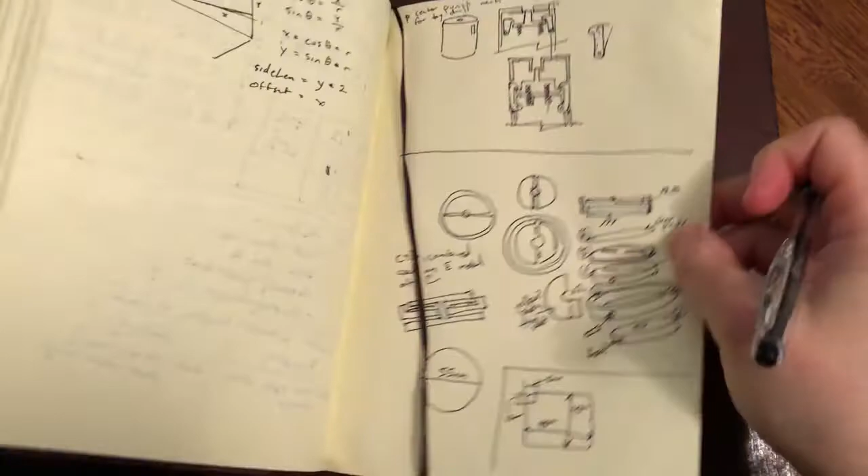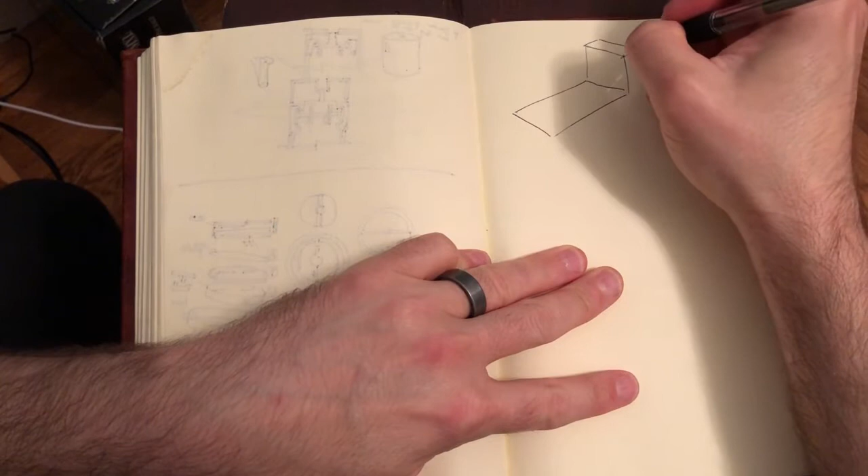Okay, so let's start planning. Just sketch out the general shape of a pinball table. We've got sort of two boxes essentially - a box in the back, and the main gameplay area. There's a couple other things of course, we need some legs for it to stand up on, but that'll come later.

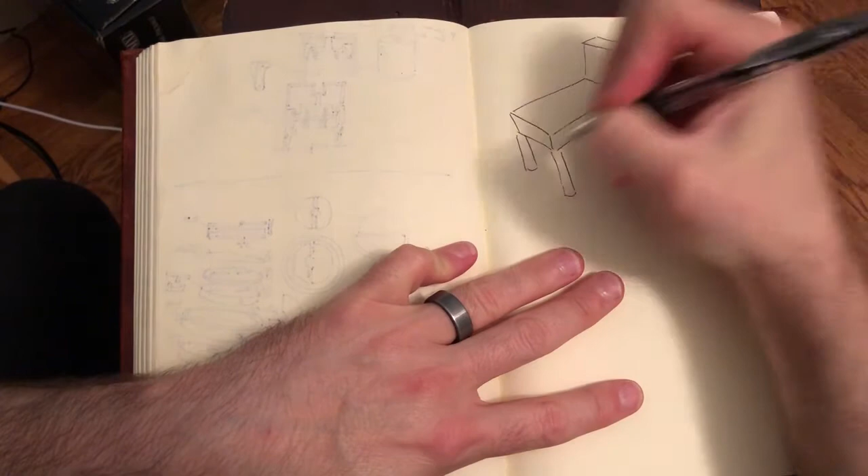What I want to do right now is figure out the main play features of this. Obviously this is going to be really small, so it's not going to be a fully functioning pinball table. So there's a question of what do I want to include and what do I want to exclude.

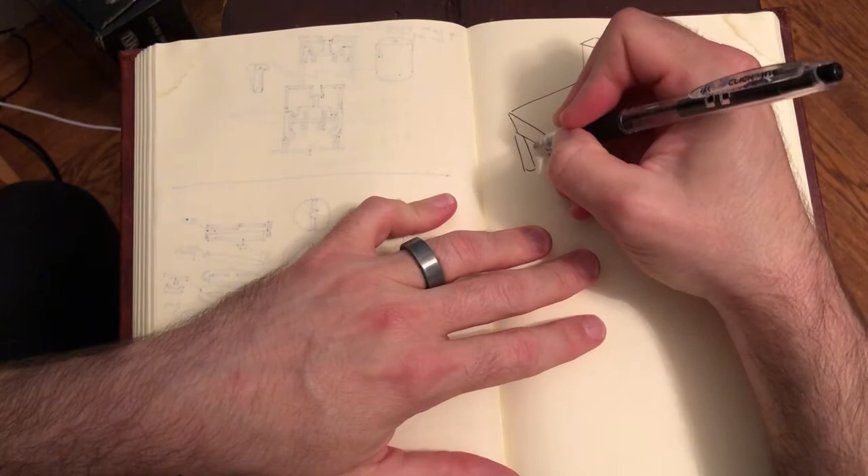There's at least a couple of things. On a real pinball table, there's what makes it fun, right? What do you do with a pinball table? Well there's a couple things, right - there's the plunger.

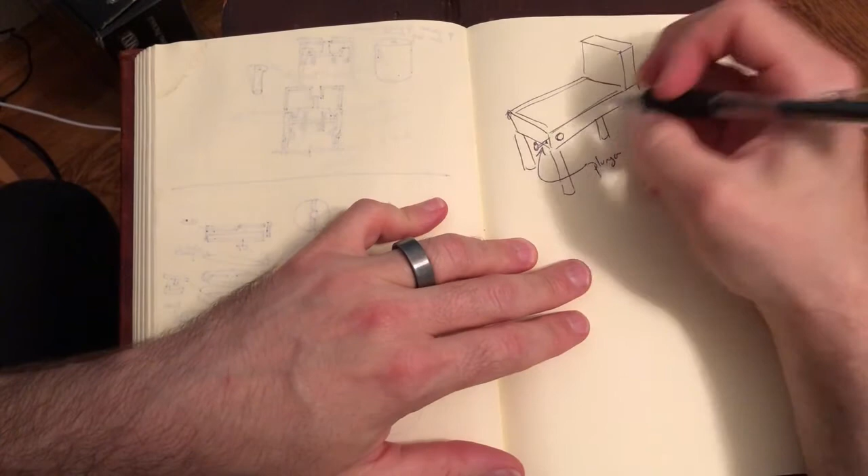We've got a plunger that you use to shoot the ball up this way, right? We've got, of course, the paddles, flippers. Sorry, apologies in advance for anybody that's a pinball aficionado, I'm probably going to get all the terminology wrong.

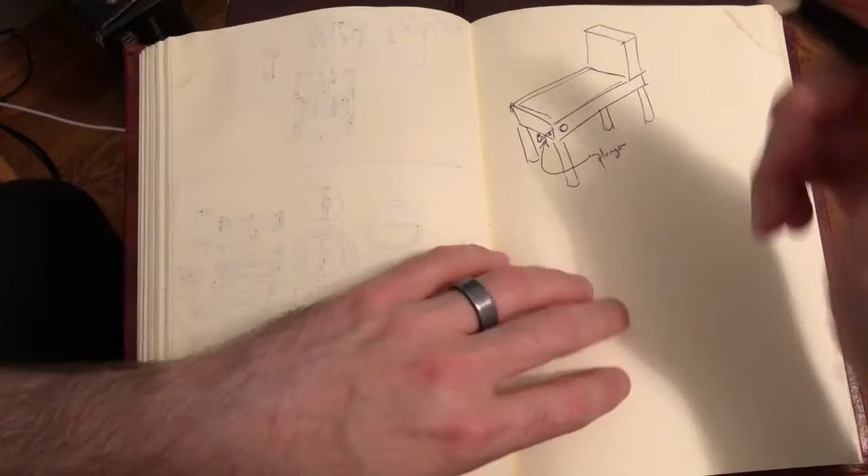Just bear with me. So we've got flippers that control, that you use to control where the ball goes. Well, as best you can, right? So we've got two of those.

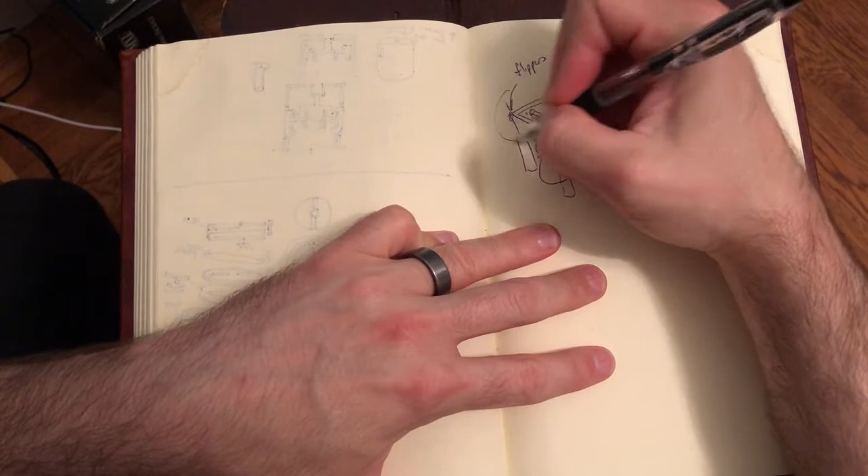We've got a whole bunch of stuff that goes on, fun stuff to hit, and in a modern pinball machine this gets really complicated, it's almost like robotics going on up here, right? And we've got some sort of display here that shows your score. So I'm not going to be able to do all of that, right?

There's no way we're going to take a fully functioning pinball table and shrink it down to 1/18 scale without giving some stuff up. So I'm going to do some compromises here.

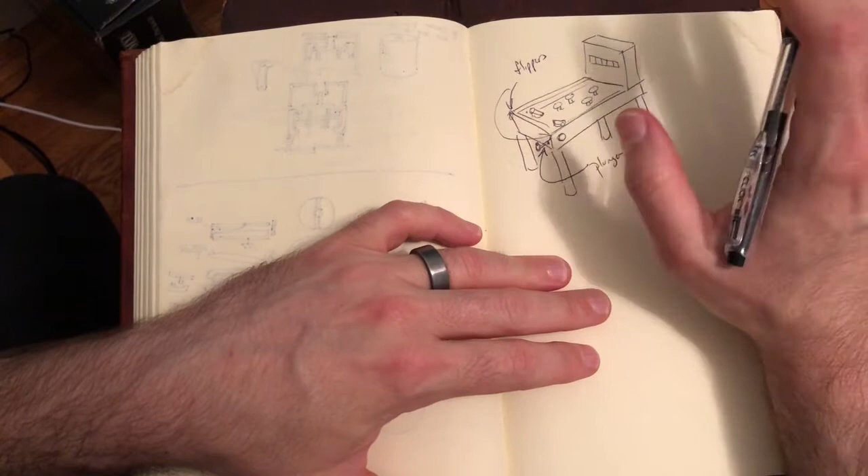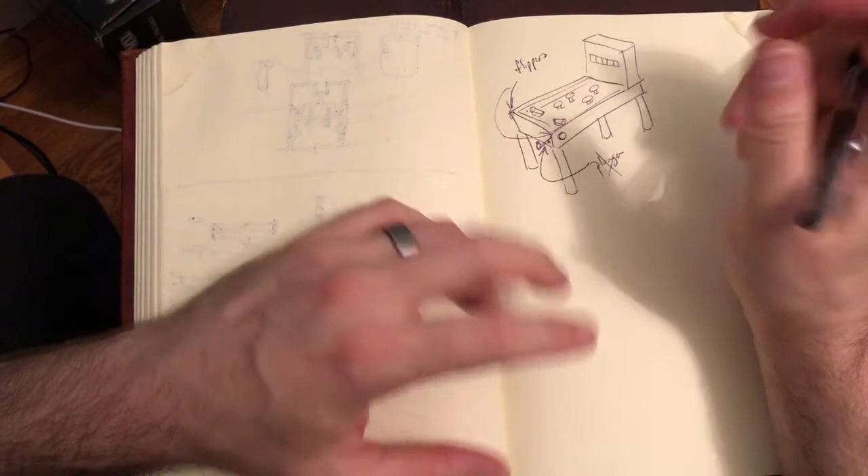What I'm thinking is I'm going to just ignore the plunger altogether, I'll come back to that in a second. I think the really key thing to make this feel like a quote-unquote working pinball table is the flippers. So I really want flippers to do something - I want to be able to push a button here, have these move, and in some way interact with the ball, right? So if I'm getting rid of the plunger, how does the ball get dropped?

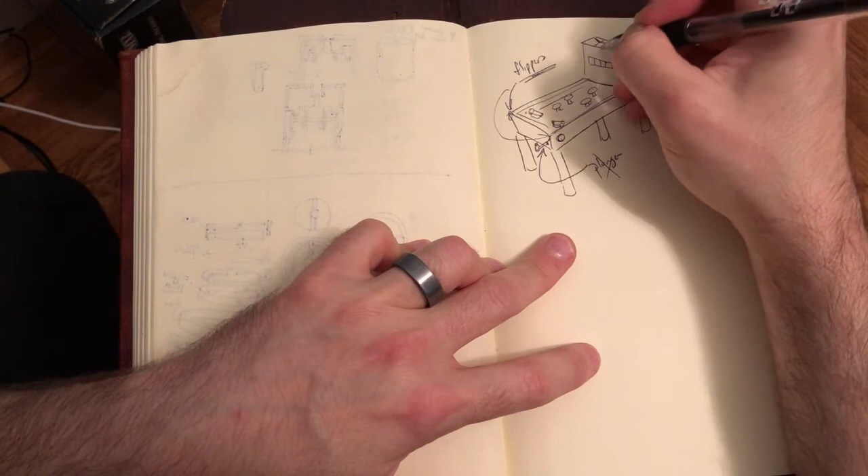Well, that's where I think a limitation kind of becomes an opportunity. So what I think I'm going to do is use this back box and have a hole here that goes down just a little bit. You'll notice I'm drawing this offset here, more on that in a second. Basically, you drop a small ball bearing in a hole here, and then have that come out here.

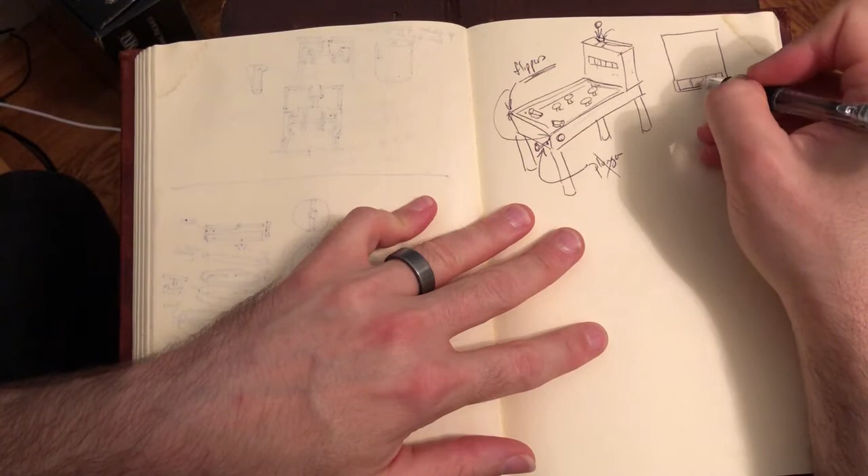So what this back piece is going to be is sort of like this - it's going to have a couple of exit spots for the ball bearing at the bottom. So this is open here, and this whole thing fits right there.

So, cross-section wise, I want this to be a little bit offset. So what I'm doing here is I think I'm going to make this like a little mini pachinko machine inside it. So you drop a ball bearing, right, and then we'll have some stuff for the ball bearing to bounce off of.

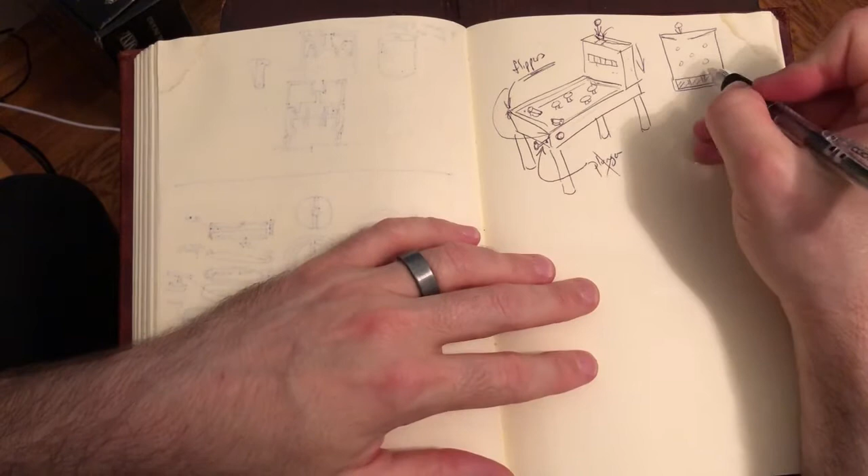Now, I know this is going to be very small. We're talking about, this isn't too much - this is almost full size, right? Probably we want it to be about, let's see, probably something like this is about the actual size it'll be for real.

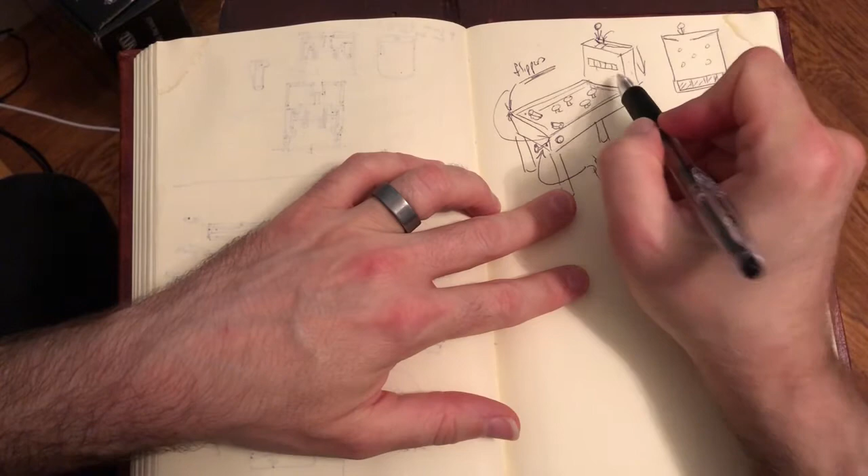But I think we can still get away with that. And what I think we kind of get, well, not for free exactly, but that got me thinking about the number displays you get on the backglass of a pinball table.

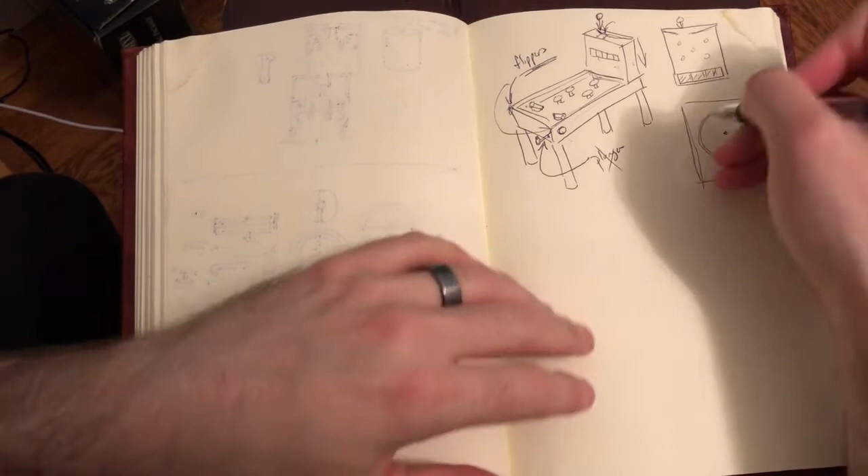I think what we can do that'll be fun is if we have a circle here with a pivot there. We can have a little cutaway right about here, and I can design a sticker to go on this circle with numbers on it. Then the fun bit is if we flip this circle on its side, we'll have a nice thin circle, maybe about 1 millimeter or so.

We'll have a bit of a spacer there. I'll probably just use like an actual piece of filament, so we'll have about a 2 millimeter hole there. But what we can do is we can put some fins here.

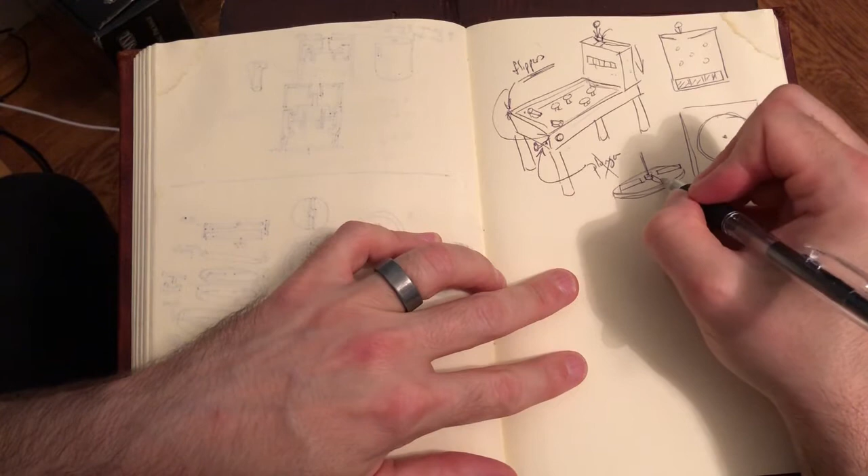And probably you can see where this is going, right? So if we have the back of this with fins here, when the ball gets dropped from a little bit offset, what's going to happen? It's going to hit these fins, make this spin, and that'll hopefully randomize the position a little bit, and then it'll drop out down here.

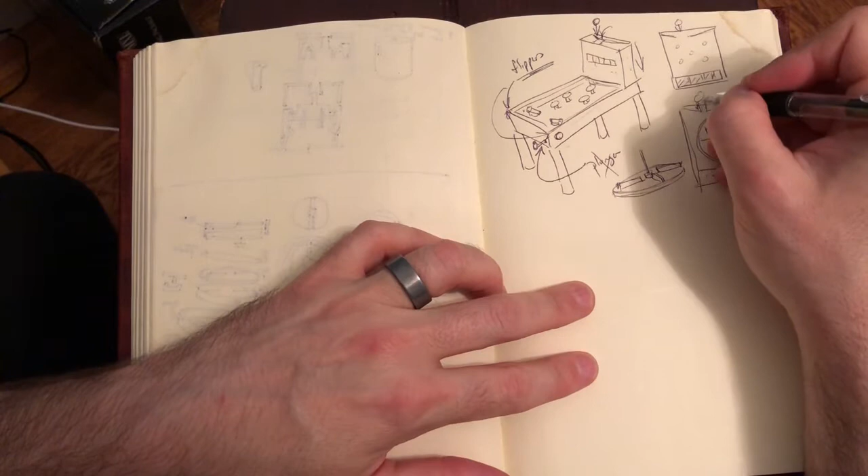This is why you want to draw stuff, because I just realized that if I drop the ball on the left here, what direction is this going to go? It's going to go this way, right? And it seems like it might be more appropriate for these numbers to move clockwise. So probably what we want is this to not be there, but we want this over here instead.

I think that's the plan, at least for this backsplash. The really important thing it's doing is it's allowing us to drop a ball bearing in and sort of letting us do without this plunger.

Again, problems are often kind of opportunities, right? As I was thinking through how that would work and thinking that I wanted something to randomize the motion a little bit, that kind of suggested this. So we'll see how that works out in practice, but I think we can make it happen, and I think that'll be really fun.

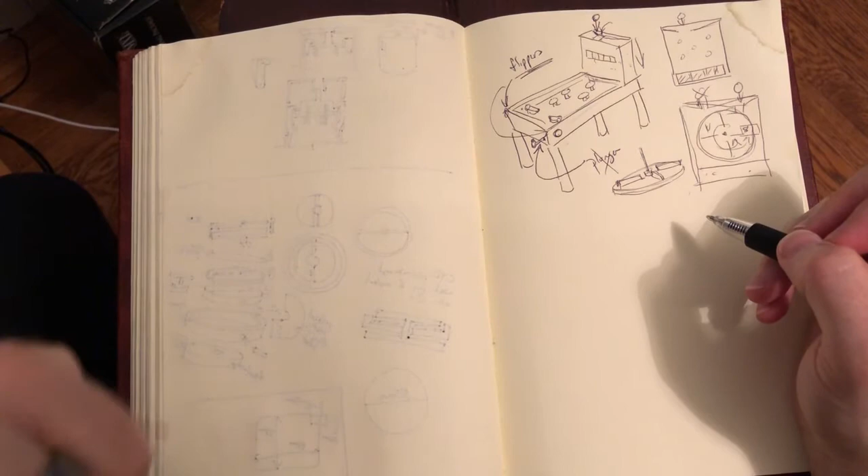Okay, so now on to the real meat of this, which is the flippers, right? So what I want is I want to be able to... there's something we have to have, something that we push in, because pulling would be weird, right? So it's got to be something you push.

When you push it, we need that to result in these flipping up, right? So that's sort of the invariant, we need to be able to do that. Oh, and another thing that we need is we need these to come back in, so there needs to be some sort of return mechanism that pushes the buttons back out.

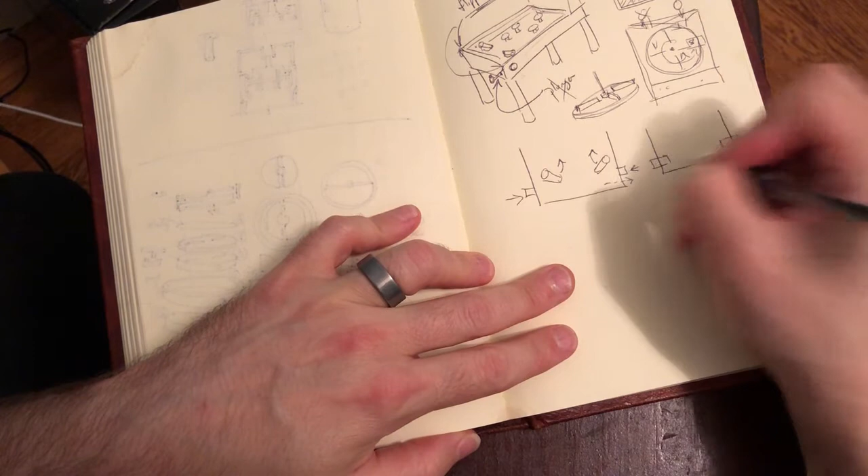So what I've come up with that I think is going to work is if we take a rubber band. Let's imagine we've got our two buttons, right? It's always good to start with the simplest possible thing. So what's a good source of force? Well, a little rubber band has worked pretty well for me in the past. If you haven't seen my oscilloscope video, I'll link that and you can see how that worked out pretty well.

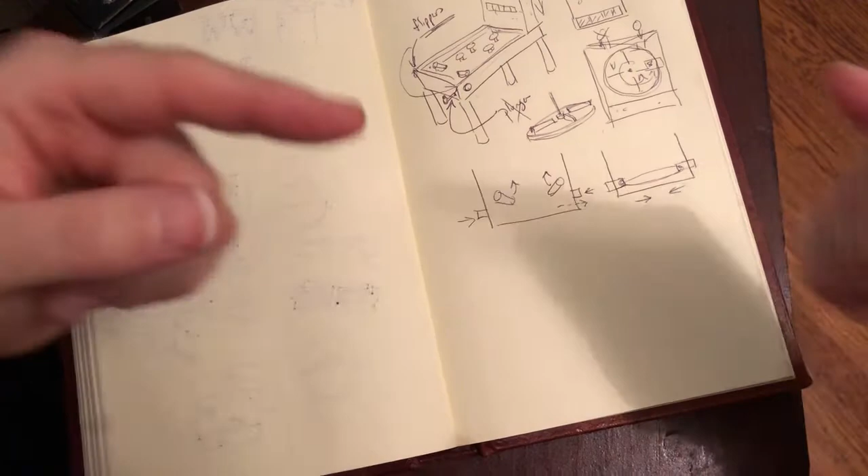So I think that's what I want to use, but what happens if we put some pegs here and loop a rubber band around them? Well, that's great, but that force is going to act like this, so it's going to keep the plungers — I apologize for getting the terminology wrong, which I'm sure I'm doing — it's going to keep this pulled in. What I actually want is the rubber band to provide some return force.

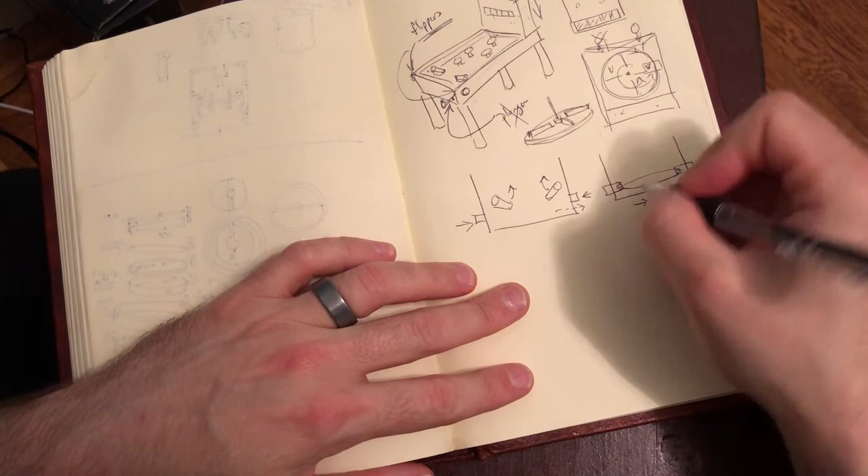So what we can do instead is, instead of connecting these directly, we can have an integrated part here that basically goes around like this. So that's a little hard to see, but it's basically like, so we have a rubber band that goes like that — it connects to one plunger and does the same thing.

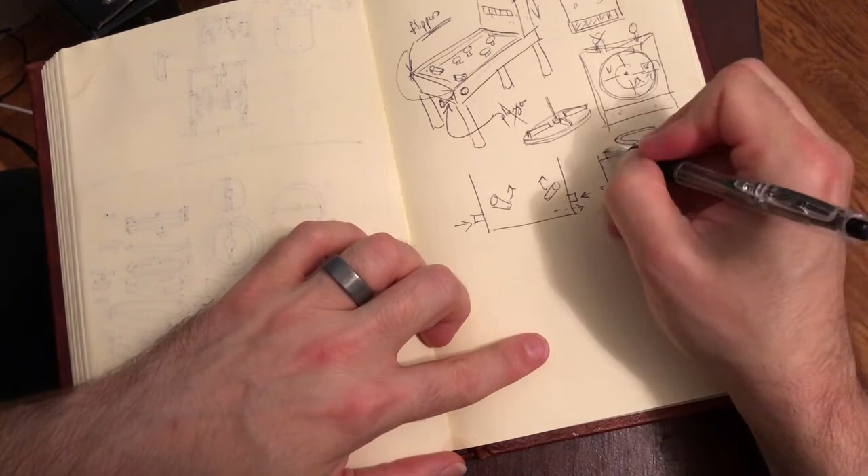Right. So this is why you draw things out. I do think this is going to work, but I have this slightly wrong. It's drawn like this, it's still pulling in, right? So what we actually need is something like this.

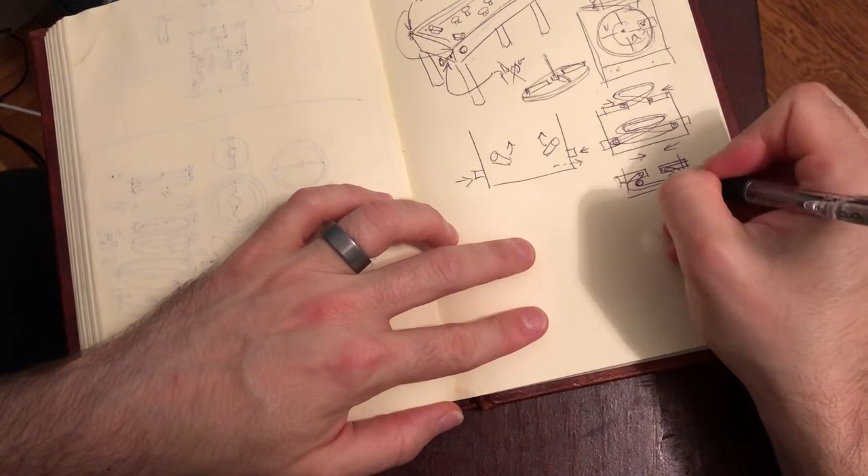So we'll have some posts here. These two posts are going to be fixed to the bottom. And the rubber band will wrap around those and pull these back out. Hopefully, that's the plan, at least.

So that gets the return action, right? I think that's getting us close. But the other thing we need to make sure is that we actually actuate the flippers. So I think the way that's going to work is we'll draw kind of big, so we have a flipper

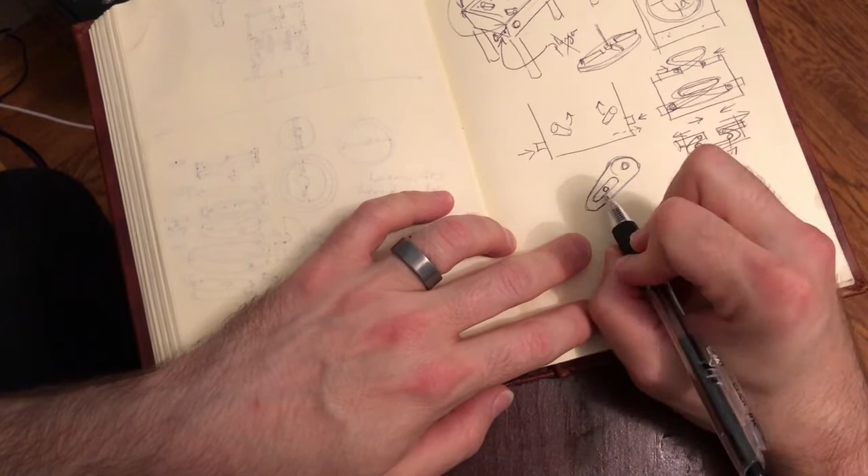like this, right? And what we'll do is we'll have on the underside of the flipper a slot. And then, of course, the flipper will have an axle there. So what we'll do is the plunger will have a little bit that sticks up and rides in that slot. So when this pushes in, it forces this in the direction we want.

Again, this is why you draw. So this would, the way it's drawn right now, if this goes that way, this is actually going to go down, right?

So what we want instead is, let's just think about what this motion looks like. So we've got, that's sort of position A, right? And then we want something that's like there. Position B, right? And now we want to look at, if we compare position A to position B here,

what points, if any, on this shape move in this direction, more or less, right? So what we've got is, it looks like if we look at where this point is, on A, compared to the center point on A, we've got that. So on B, that would be about there.

So it looks like we can do something with that. If we draw that, we've got something that might work. And I think actually what we need to do is flip this relationship around. So when I first drew this incorrectly, in a way that's not going to work, as we found out, as we kind of thought through it a little bit, right?

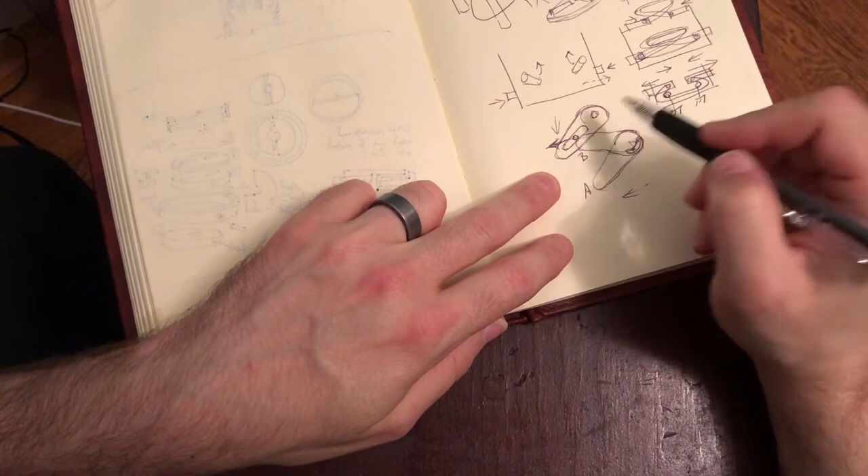I had this peg being a part of this plunger, and the slot belonging to the flipper. But I think what we want to do is we want to flip that around. So the flipper will have a peg, and that'll fit into the plunger.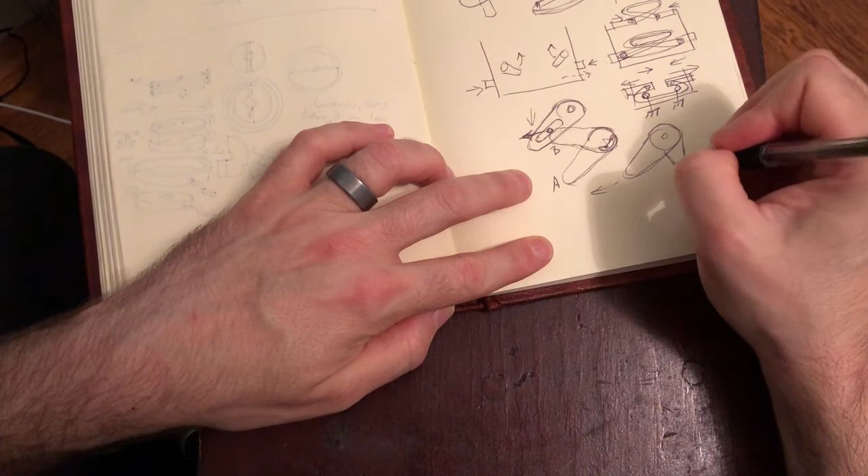And I think we might end up needing the flipper to have something kind of like coming down, right? Yeah, I think this is what we want. This is what we want.

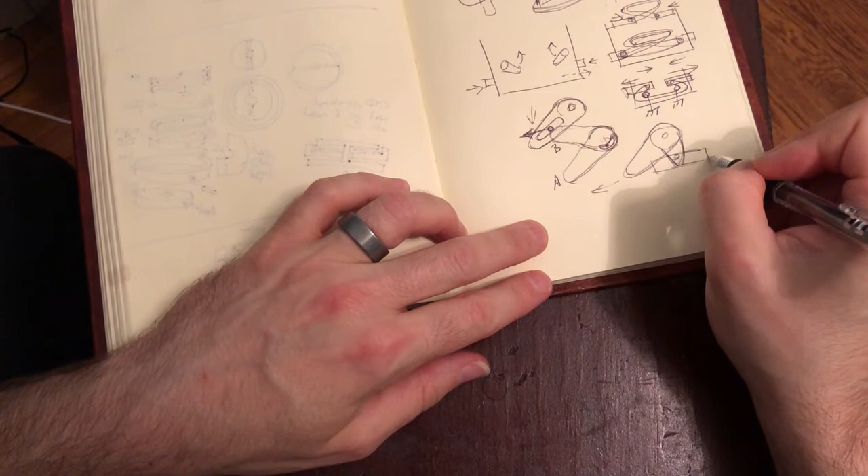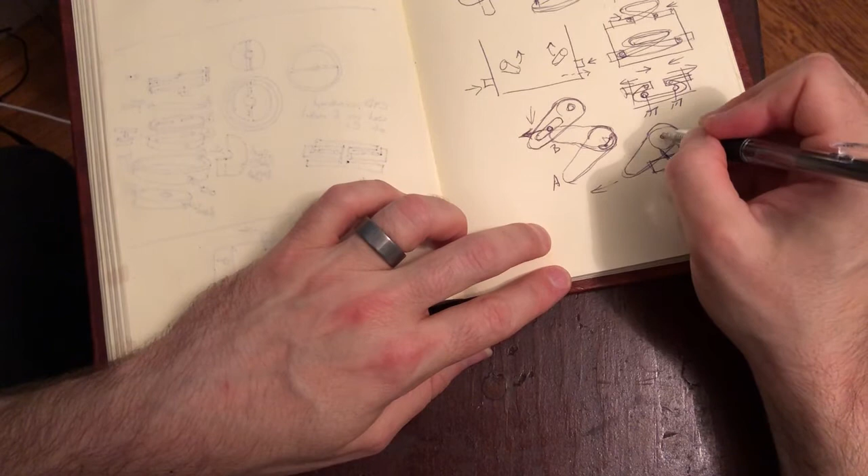So we'll have the flipper here, right? And then we'll have sort of a flat that comes down with a peg, and that'll ride in our plunger. So this goes that way, which will make this part also go that way, but offset from this rotational pivot, which will make our flipper go up.

So that's the general idea. This is kind of like the first phase, right? When I'm designing something like this, I want to just kind of think through the general idea. I thought of most of this earlier today when I was walking my dog.

Obviously, you can see as I went through it, some things were wrong, right? My idea in my head was a little bit different than reality, as it is for so much of life. But luckily, with this kind of thing, all you need to do to correct that is just take a pen and some paper and figure it out. So I think this is all fairly good, but now I've got a general idea.

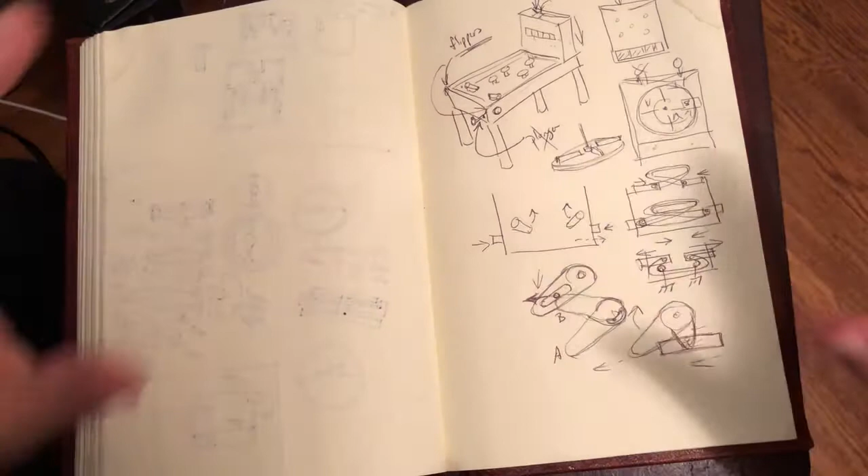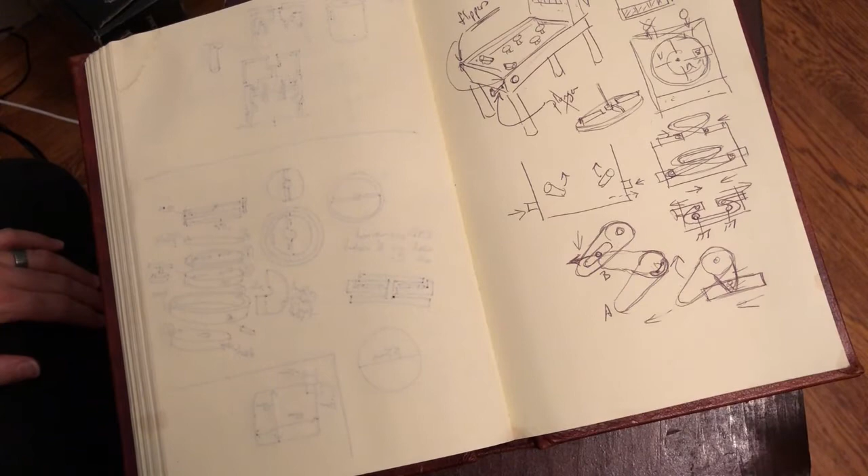I want to at least attempt to do basically some on-paper CAD design. So what I mean by that is I like to just kind of try to draw out what some of these parts actually are going to look like. So the way I like to do that, and I'm going to not use A and B because I already have that here,

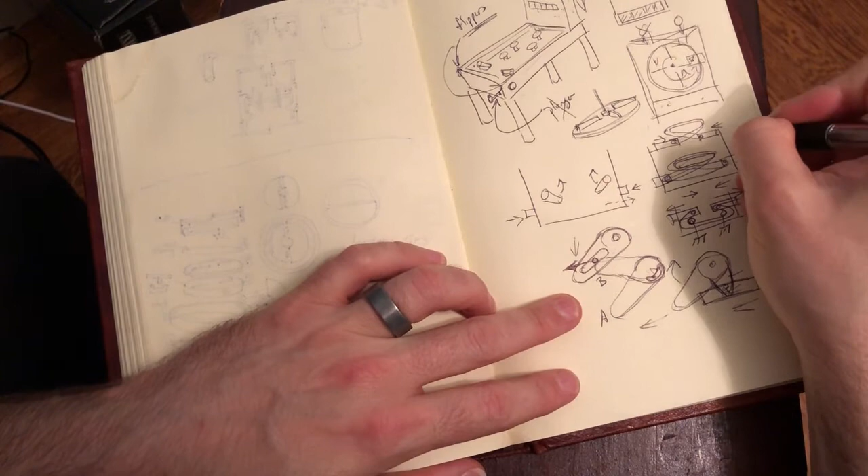but let's start naming some of these parts. And since naming can be a huge hassle, I just tend to give them letters. So I'm going to call this C, right? So this thing that exists to be a button, a tiny button on the side of the overall assembly that a user or player can push. And I'm going to call this flipper assembly D, right?

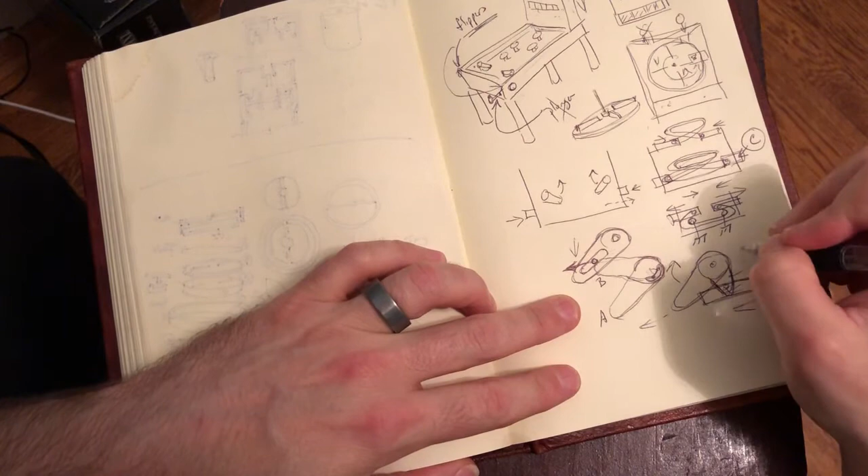And there's going to be a couple of parts to this main thing. So I feel like I've got enough of a handle on the back part.

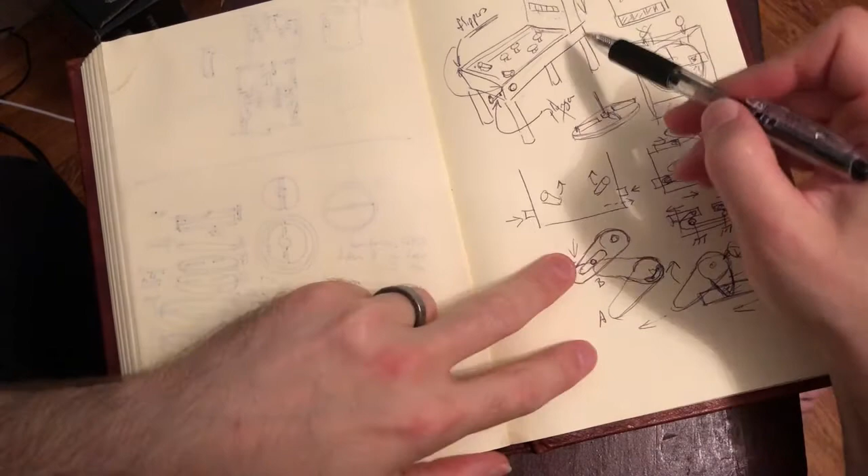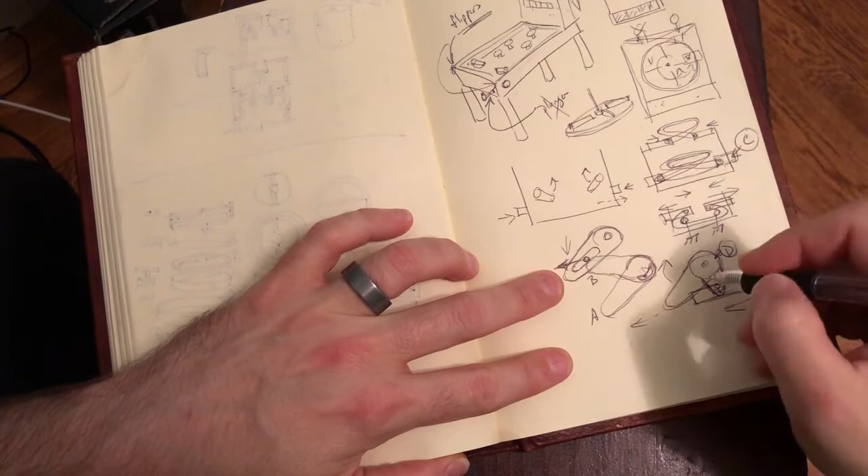Got enough of a handle on this to head to FreeCAD and start making it. But I think I need a little more clarity around the way the flipper mechanism works. So I'm going to give these some names and try to draw exactly what those shapes are going to look like. I need a little more paper.

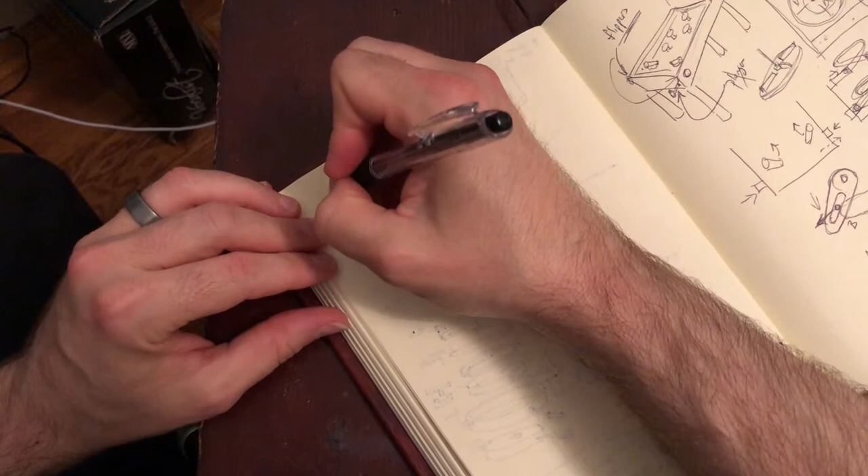So let's tackle C. This is one system, but we're gonna tackle C first. We know one end of it. Let's do top down, right? It's gonna be some sort of cylindrical bit. And on the very end...

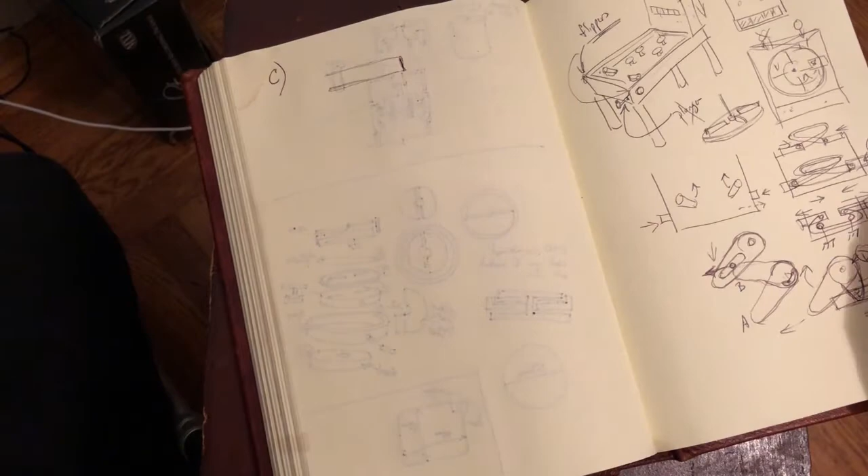Over here it needs to have something that a rubber band can grip and kind of pull. I think the rubber band actually needs to be internal. So we want something like this that goes around. There'll be some peg, fixed, and we want that internal. And then it needs some sort of slot. Okay, so I think what we want is something kind of like this.

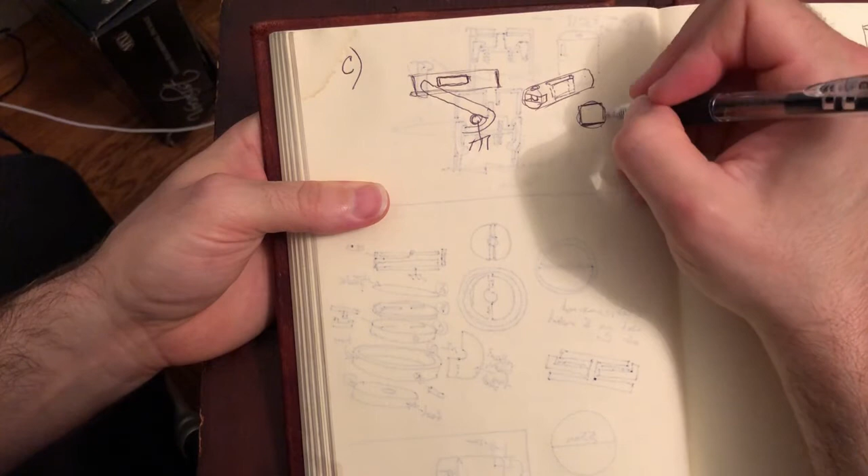So what we've got here is basically a cylinder, although for 3D printing we'll probably want to make this... since this is going to slide back and forth a lot, it probably makes sense to accentuate that. Well, not accentuate, but I'll get smoother motion if both the top and the bottom are flat. So probably make this actually just a square cross section. Let's do that - a square cross section. Maybe we'll still have some roundedness here.

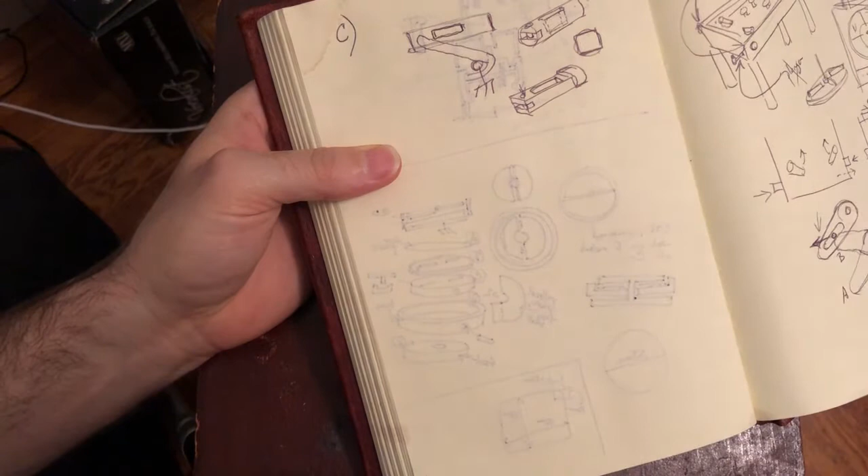We'll see about that. But then we're going to have a little cutout here, with the idea being that we fit the rubber band through here and put a little piece of filament. So this will basically be a peg for the rubber band to fit through. And then here we have a slot. So I think that'll be basically what we'll want. It's good enough to start CADing that out.

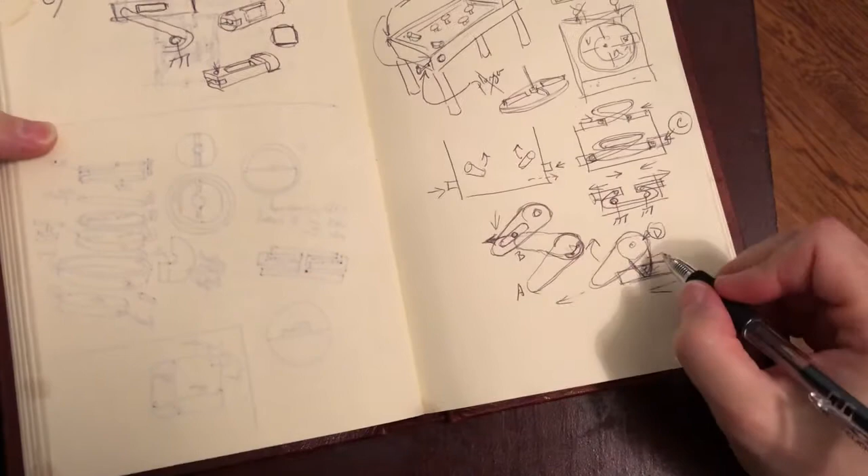Okay, so now let's talk about D - D being our flipper here. Now I already know that D is going to need to be two parts, actually, just for printability, because what I want is something that has the flipper here, but then right below that has this additional bit here to come down and give us an offset.

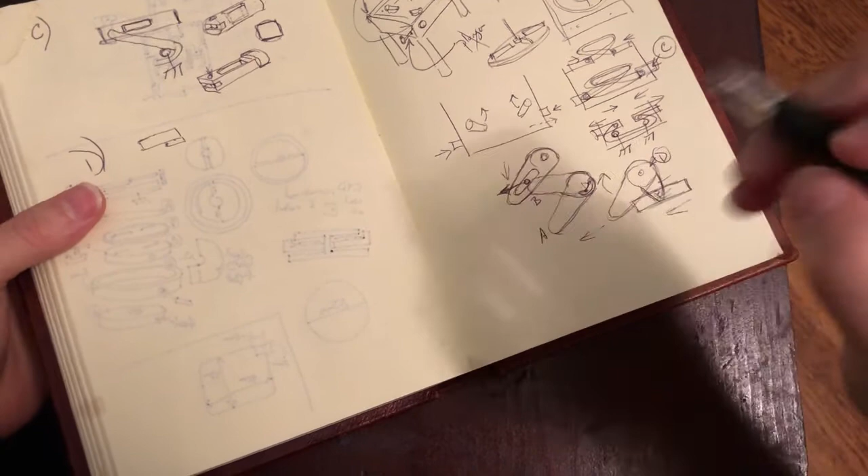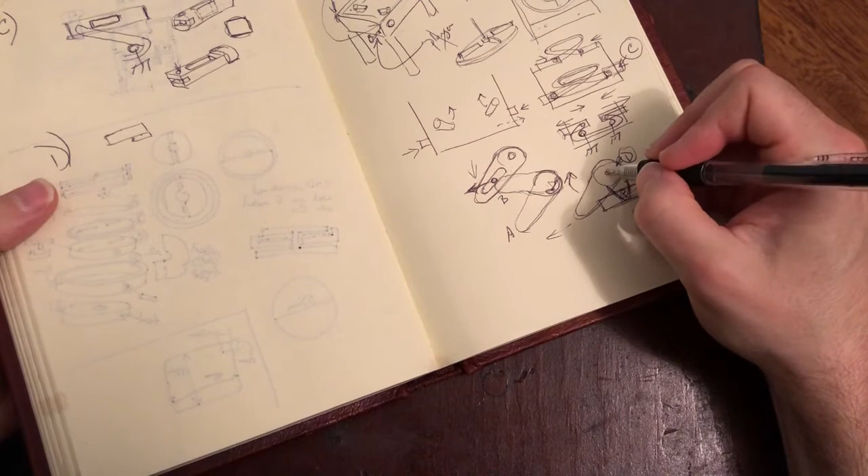And the reason we need that offset is these parts are going to be tiny, tiny, right? And to get any sort of actual motion of the flipper, we need the distance from the pivot to the part that's being pushed - we need at least a little bit of a gap there, or else we're not going to get anything. So yeah, we're going to need two parts.

That's going to end up looking kind of like this. So we'll have a flipper, something kind of like that. And then here we'll have an additional sort of bit that comes down. And then this will have a peg.

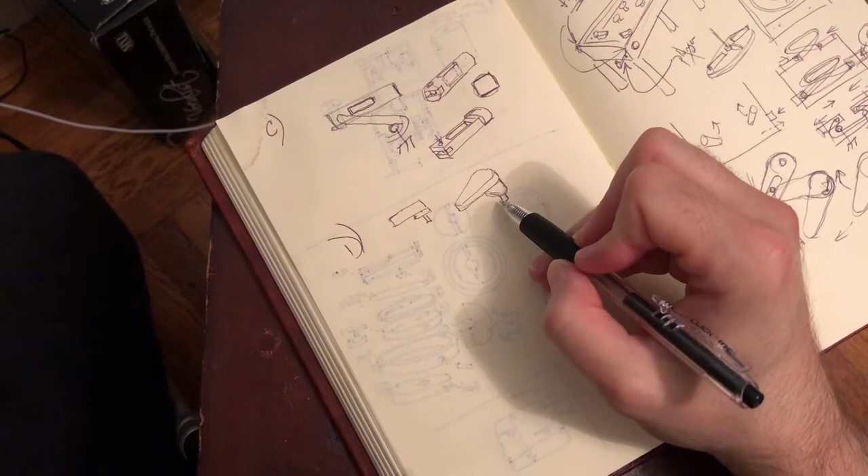Now this is already something that isn't exactly printable in one piece. And there's an additional problem - I guess I could print it with this surface on the print bed and have a lot of support for this, but that's still no good, because we also need, in between, the bed, the actual play surface. So yeah, it's gonna come in a couple of parts, which is fine.

I think what we're gonna have is the flipper itself - I'm gonna flip this over, and it's gonna be a part that looks like this. So something kind of like that. And it's going to have an axle that points up.

So what this will do - this part will be the pivot that it turns on, and this will also go through holes in the play surface. So the play surface is going to be one of the easier parts about this - it's mainly just going to be flat with some holes in it for this to go through.

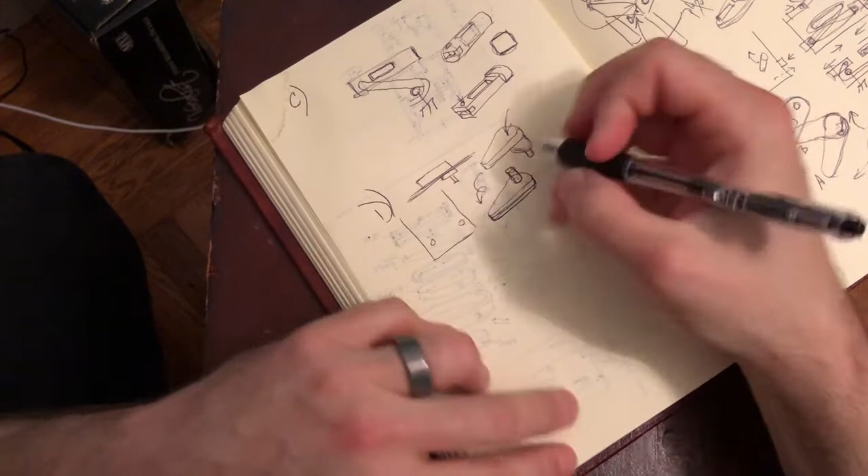And then we'll call this sort of like D sub 1 - this part. So D sub 1. Now this part, we'll call that D sub 2. So that part is going to need to be something that also grips this. So it's basically going to be a part, again I'm going to draw this upside down, kind of like as it's going to be printed on the bed.

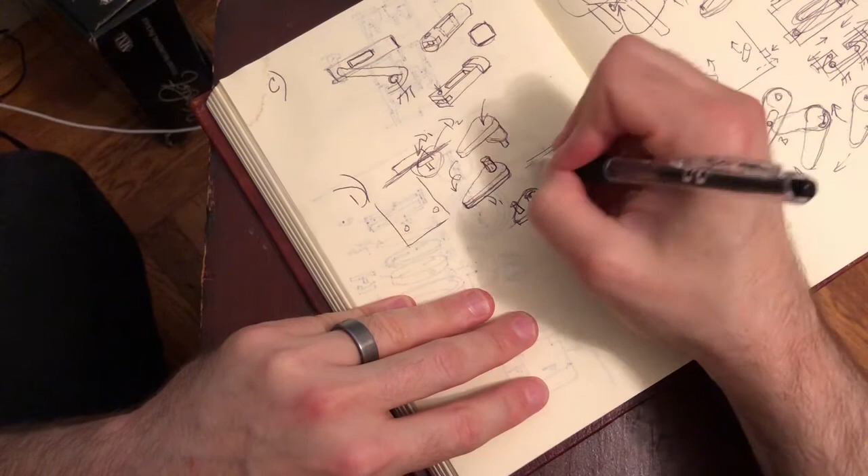And this will also be essentially like that. And probably we'll have maybe a little bit of a raised portion here, because that is going to grip this. So what we'll have altogether is both of these are sort of upside down from their actual configuration. This will be the play bed, or the play surface, right? And there'll be a hole there towards the side. So here's kind of like the edge of the overall assembly.

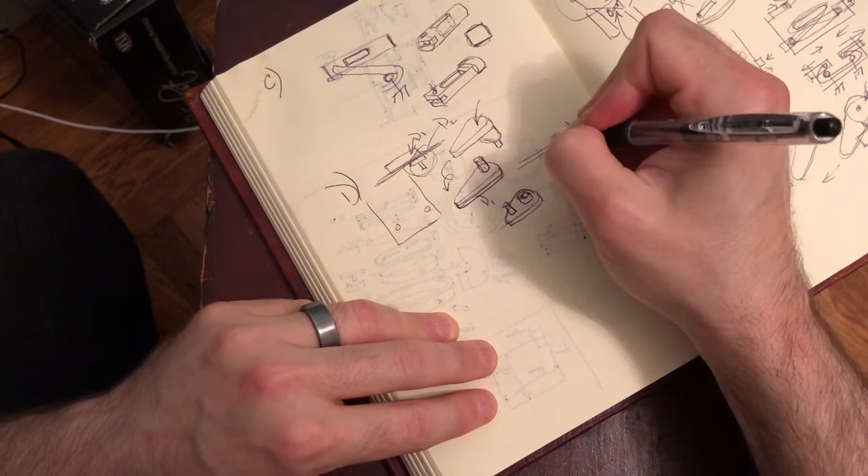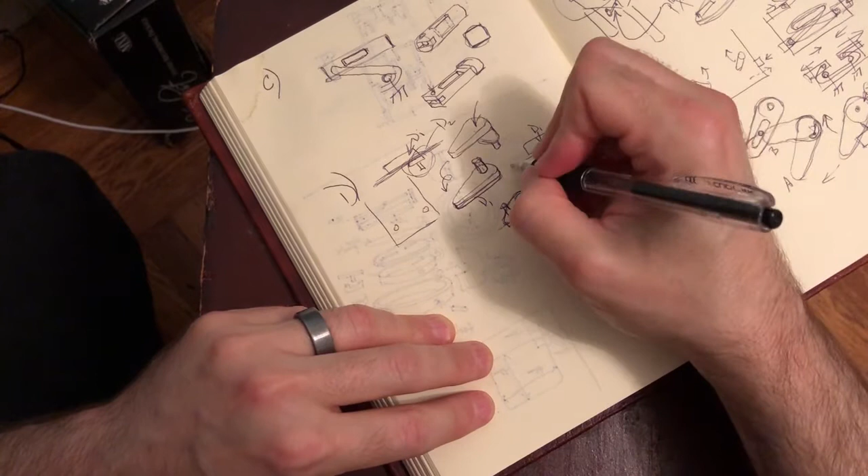And then here's our flipper with an axle that goes down here. So we have our D sub 1 here, and then here is our D sub 2, with another axle. And then that all fits into the slot on our C here. And then we have a rubber band kind of going here.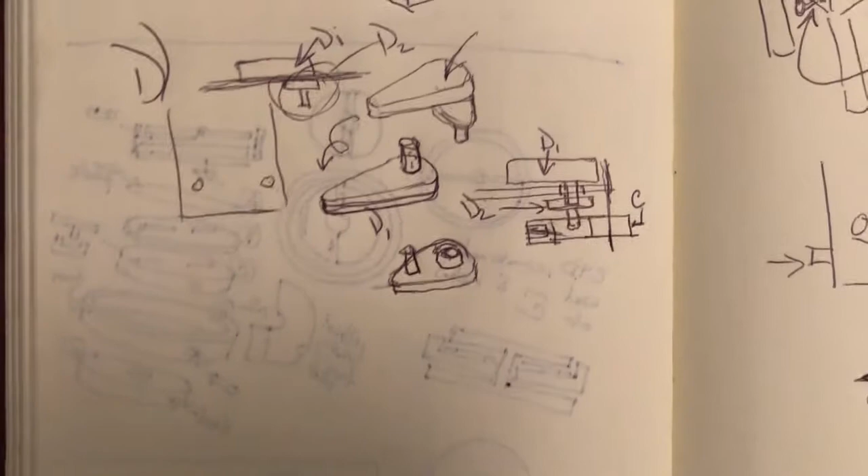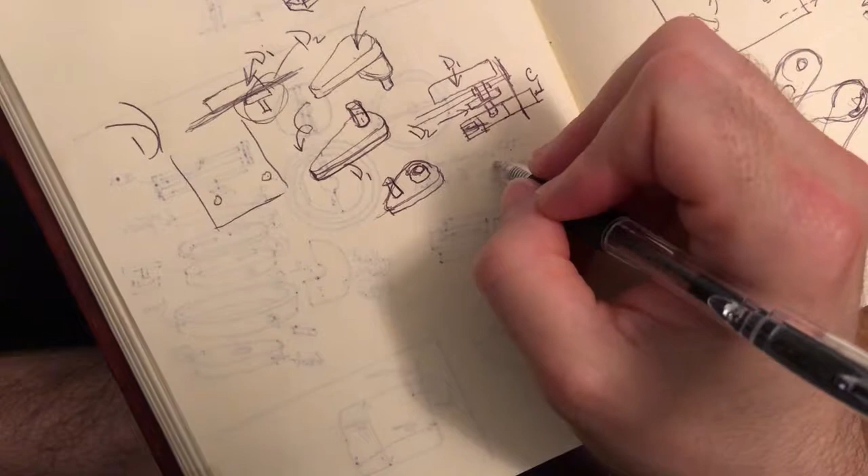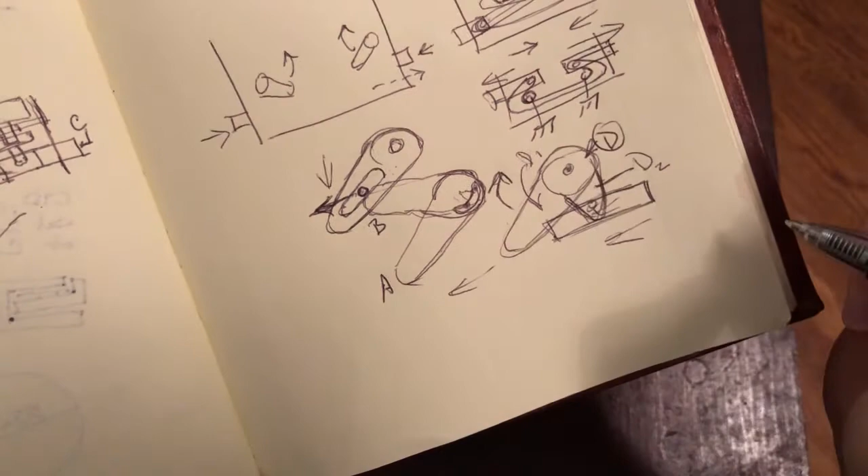So this is kind of what the front looks like. Try to get that closer. Yeah, so we've got our D sub 1, our flipper, goes through a hole, is gripped by D sub 2, which has an offset from top down. Again, it looks like this, right? So we've got our D sub 1 is here, and this is our D sub 2. And then this here is our C.

At this point, I felt like I had a really good grasp on what I needed to build and how it would work, and I felt pretty confident it was going to work out well. There was one thing that was immediately apparent about the rubber band mechanism as soon as I went to FreeCAD and started building it, but we'll talk about that in the next video.

But there was one more thing I needed to do with the planning. I knew how I wanted the mechanisms to work, but I also needed to get a feel for exactly how big things needed to be, to get some dimensions. I know I want it to be 1/18 scale, but what does that actually mean? So I actually have a tool that I built that helps me a lot in this kind of circumstance.

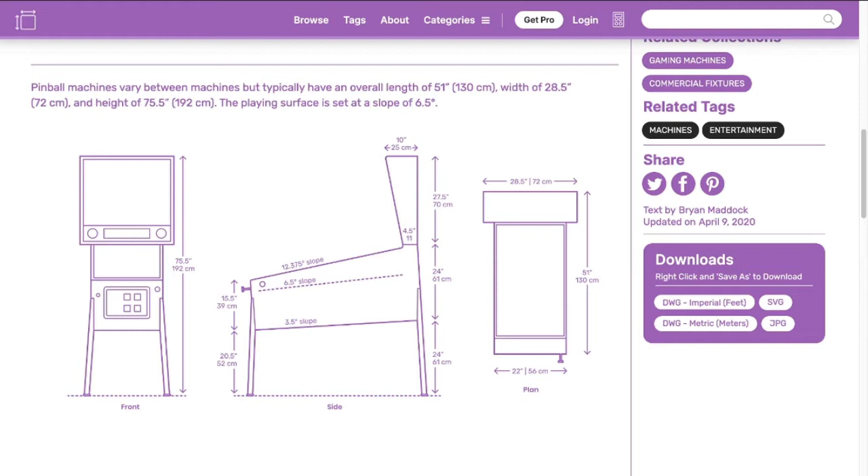So what I do is I start by getting a good reference image, and there's this really great website, dimensions.com, that has wonderful reference images for a whole bunch of stuff. So I went there and searched for pinball, and got a really beautiful image of both front view and side view of a typical pinball machine. That's great, and it's all in real world units. So we see that the height of the pinball machine is 192 centimeters. That gives me a really good starting point.

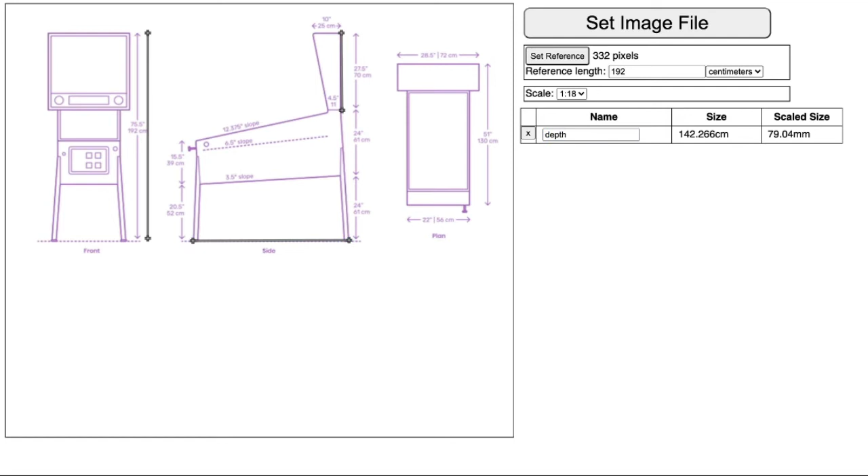But of course I work in 1/18 scale, so that's where my tool comes in. I wrote this tool using JavaScript in the canvas that lets you drop an image in. What you do is draw a line on the image and say how big that line is, so that's your reference. You set a reference to a set distance in centimeters, inches, whatever you've got handy, and then you choose a scale. Of course I use 1/18 scale, but there are other options. Once you've done that, you can just draw additional lines, and the tool will tell you how long that distance is in your preferred scale. So the upshot is I can just draw lines, and it'll tell me exactly how many millimeters that should be in 1/18 scale.

So I did that and got a bunch of measurements, and with that I was ready to actually go to FreeCAD.